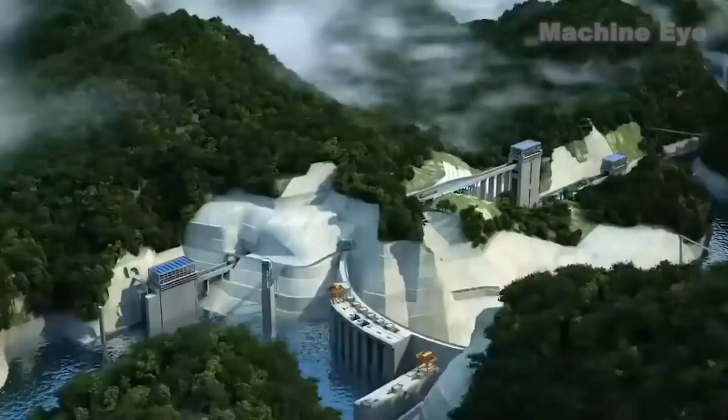Simply the largest, most expensive, most powerful, and arguably the most controversial dam in all of history. Today, we take you to China. China is building the world's largest dam in Tibet, in the upper stream of the Brahmaputra, this river flows. The very terrain that once halted vessels in their tracks has now transformed into a pathway for massive ships to glide across. How could such a feat be achieved? What kind of groundbreaking technology would make this possible? Join us as we dive into this colossal project, which is reshaping an entire region and pushing the boundaries of what we thought was possible in infrastructure. Could this combination of hydropower and transport innovation be the key to the future? Stick around to find out.

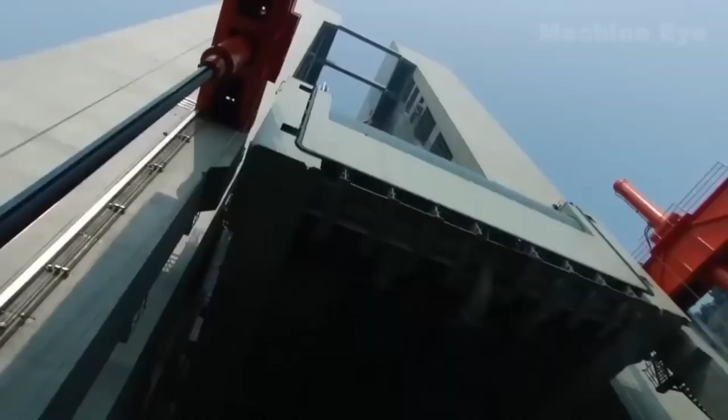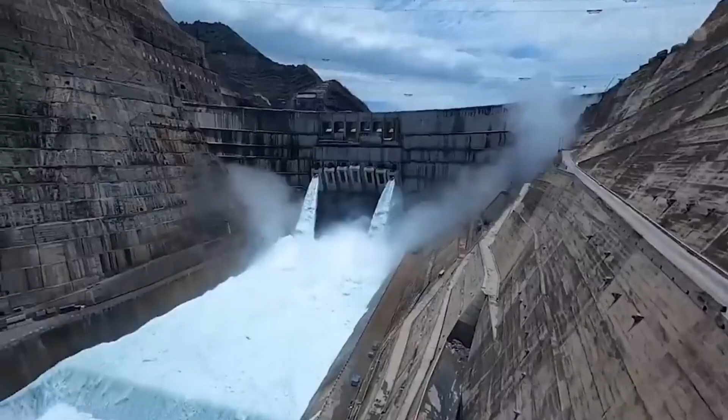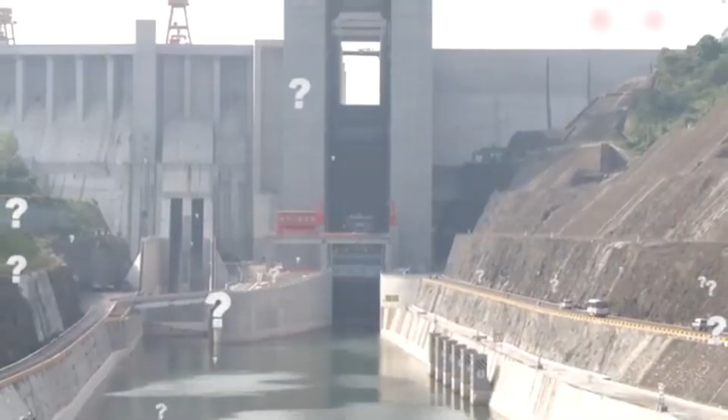Hydropower in China's energy strategy. Hydropower plays an essential role in China's renewable energy strategy, contributing significantly to the country's efforts to reduce carbon emissions and combat climate change. As one of the world's largest producers of hydropower, China relies on it to meet a substantial portion of its growing energy demands. The country's vast network of rivers, including the Yangtze and the Yellow River, has enabled the construction of some of the world's largest hydropower projects, helping China become a global leader in renewable energy production. Hydropower serves as a key component of China's overall energy mix, alongside solar and wind power, allowing the nation to gradually shift away from fossil fuels. China's focus on hydropower is driven by its goals to achieve energy security, reduce air pollution, and lower greenhouse gas emissions.

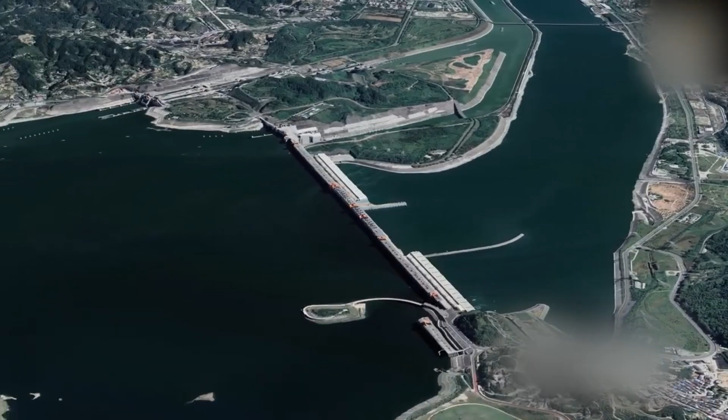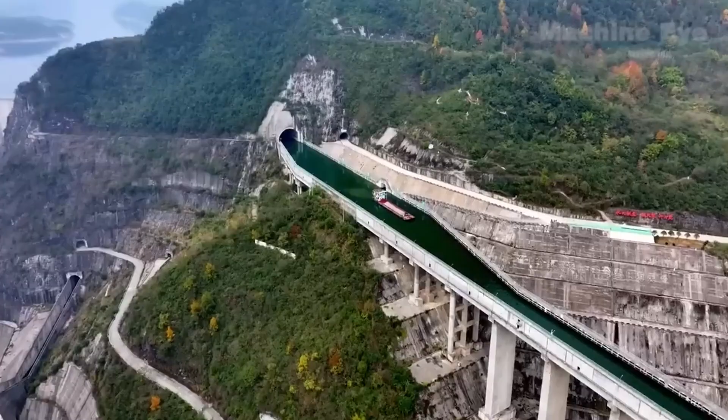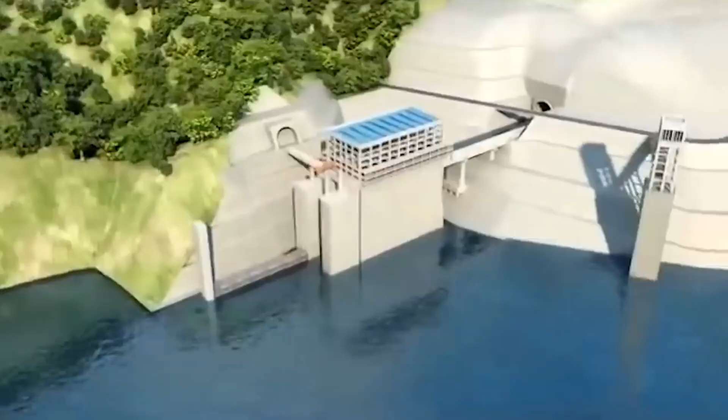With massive energy needs due to its population and industrial base, China has made hydropower a central part of its strategy to increase the share of renewable energy in its overall energy portfolio. It also allows the country to take advantage of its natural topography and river systems, which offer ideal conditions for building large dams and power stations. As the global demand for clean energy rises, China's hydropower sector has grown in prominence as a model for large-scale renewable energy projects that offer both environmental and economic benefits. The hydropower initiatives entirely suit China's commitments to international obligations to decarbonize, with global energy sustainability actively discussed in international agendas. China's own showcase of hydropower technologies becomes the solution for large, clean energy production, such as the Three Gorges Dam, Baihetan Dam, and Goupitan Dam in China are some of the most advanced engineering marvels in renewable energy generation. These are projects that not only suffice but also serve the world's sustainable future by providing alternatives to coal and other non-renewable energy sources.

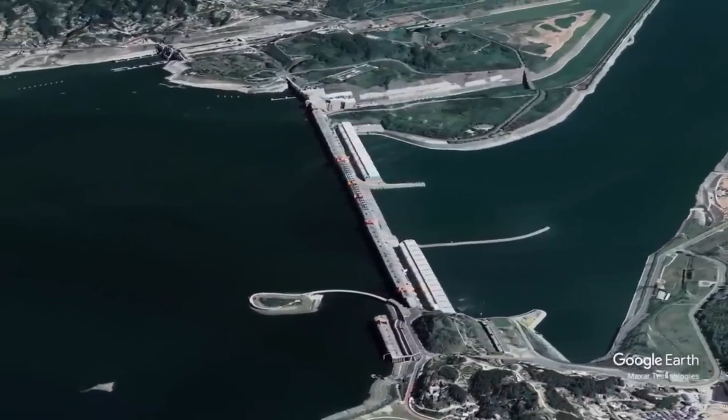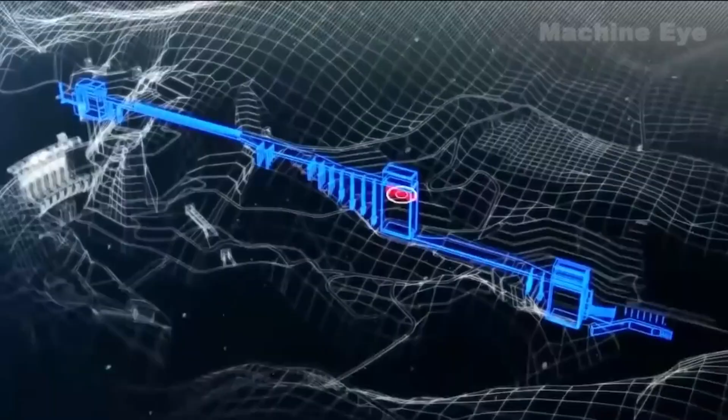However, the social and environmental impacts of this impressive hydropower wonder are hotly debated in China. Construction of large dams and hydropower stations will normally require flooding extensive areas with the attendant displacement of communities and disturbance to ecosystems. China has now advanced a program of strict environmental regulations and ecological restoration designs for the affected areas. Thus, hydropower remains the mainstay of renewable energy in China as it balances energy demands with the country's sustainability goals and economic growth ambitions.

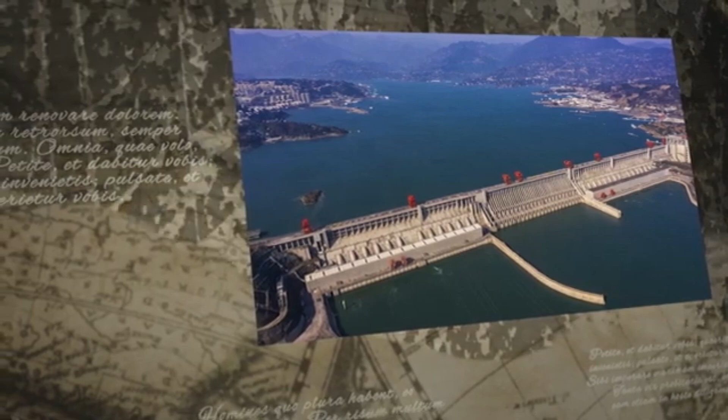And when it comes to pushing the limits of engineering, one hydropower project takes it to a whole new level by merging energy with transportation in a way you've never seen before.

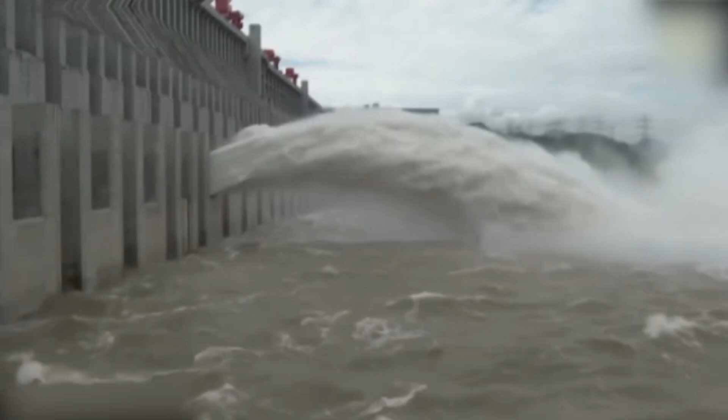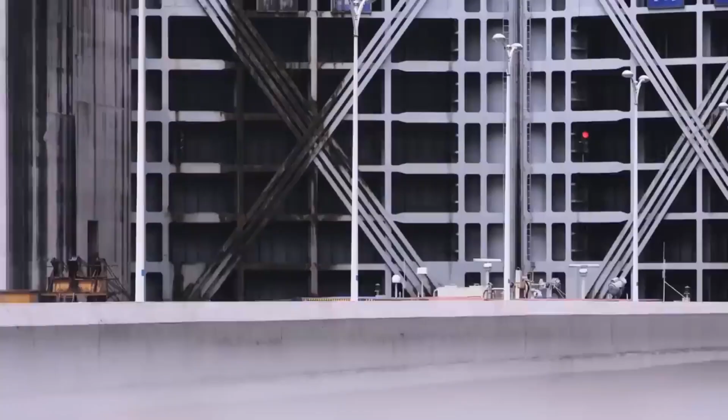Top hydropower projects in China. China is home to some of the world's most impressive and influential hydropower projects, with the Three Gorges Dam standing out as the most iconic. Located on the Yangtze River, it is the largest hydropower station globally, both in terms of installed capacity and power generation. With a capacity of over 22,500 megawatts, it produces more than 100 terawatt-hours of electricity annually, which helps supply power to large portions of the country, including major cities like Shanghai. The Three Gorges Dam is a symbol of China's engineering prowess and commitment to renewable energy, and its sheer scale makes it a crucial part of China's energy strategy.

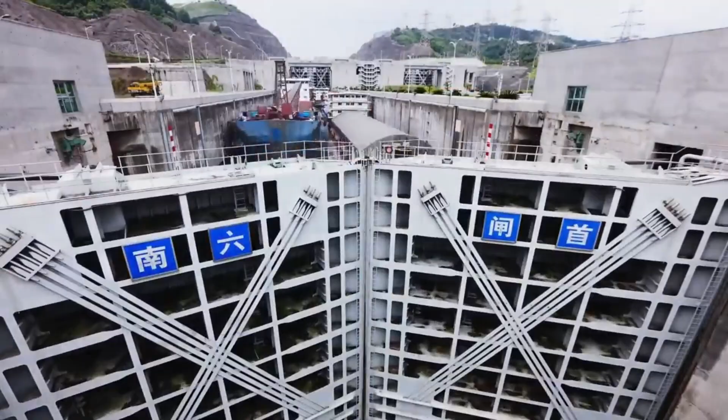Another remarkable hydropower project is the Baihetan Dam, which holds the title as the second largest hydropower station globally, located on the Jinsha River in southwestern China. The Baihetan Dam boasts an installed capacity of 16,000 megawatts. Its construction involved complex engineering challenges, such as tunneling through mountains and managing the region's seismic activity. Baihetan is crucial for stabilizing power grids in the southwestern and central regions of China, providing energy to regions that historically suffered from power shortages. This project further cements China's position as a leader in hydropower generation.

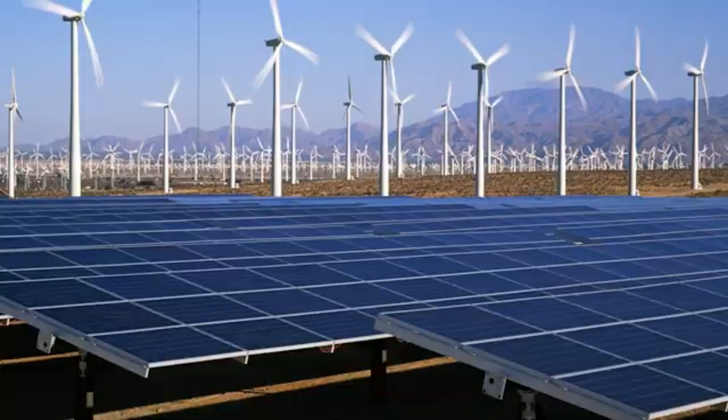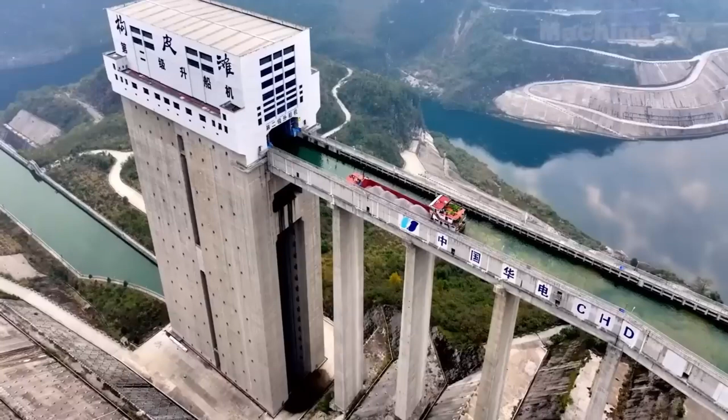Another very impressive hydropower station with respect to not only capacity, but also innovative support infrastructures is the Goupitan Dam alongside the Wujiang River in the province of Guizhou. The Goupitan hydropower station generates energy using 3,000 megawatts of installed capacity and is still the world's largest shiplift system. This system is supposed to be used to bypass the dam and river ships so that they can continue navigating the river. Renewable power generation and advanced transport infrastructure thus together prove the capacity of China to harmonize energy creation and logistics. Finally, these three hydropower stations might stand on a significant portion of the energy capacity for the country

in the future, with regard to not just conventional energy but also renewable energy. Not just to the world do they show how competent China is in availing itself of its natural resources for the development of this country, but they also demonstrate how much effort China puts into developing technologies and methods to counter all geographical and environmental challenges.

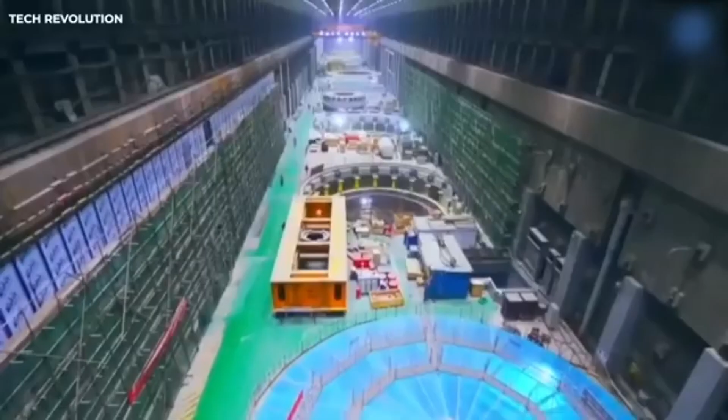These projects depict how hydropower is central to China's energy. The Goupitan shiplift, located at the Goupitan hydropower station, stands as one of the largest and most impressive examples of this technology. It consists of a multi-stage vertical system that enables ships to ascend a massive 199 meters, equivalent to the height of a 66-story building.

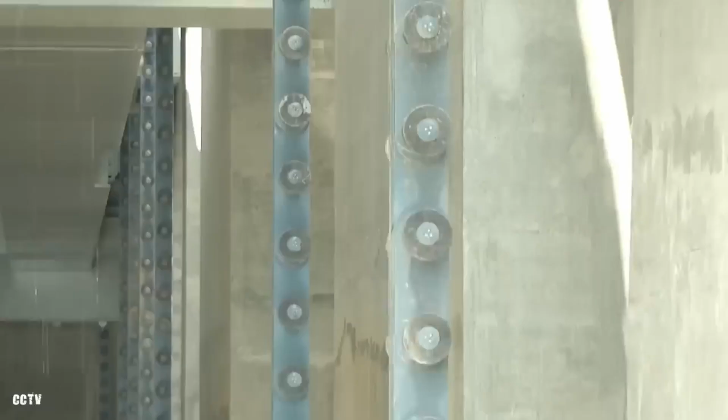This lift system allows vessels traveling on the Wujiang River to bypass the Goupitan Dam, which would otherwise impede navigation due to the extreme height difference between the upstream and downstream water levels. The shiplift works by using large, water-filled chambers to raise and lower ships with the help of a series of cables and gears.

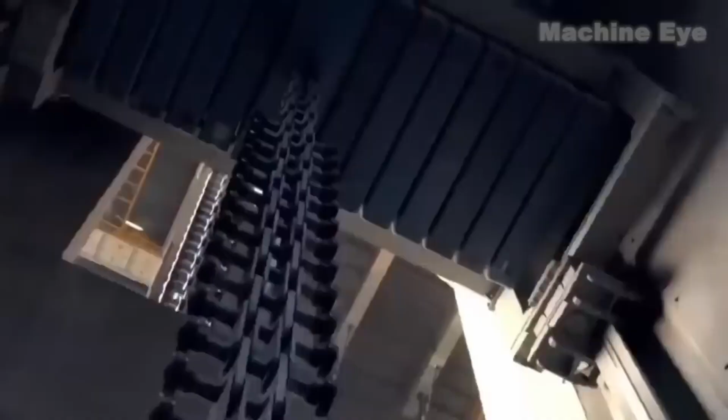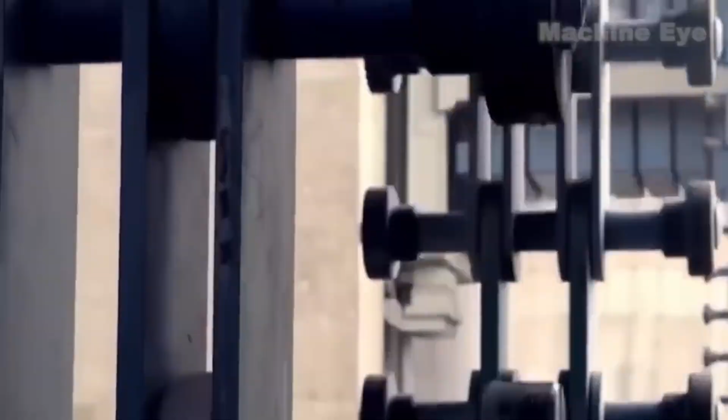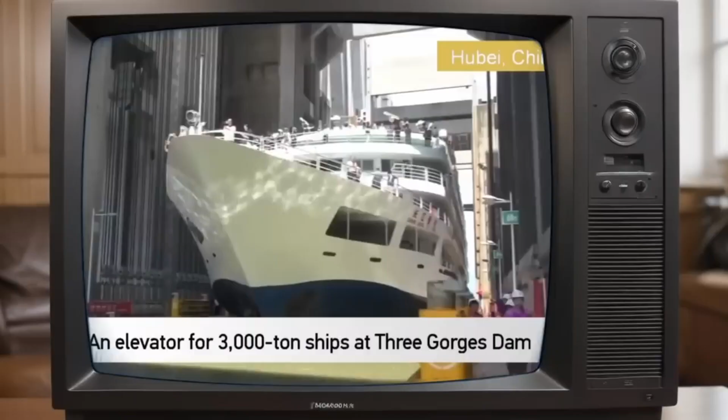These systems enhance the economic opportunities for remote regions linked to such waterways with more extensive inland ones, and by minimizing the truck travel, they lead to more sustainable development, since emissions from trucks are very carbon-intensive. Therefore, shiplifts lend themselves to being an important and emerging piece of the infrastructure evolution as traffic increases for cleaner, more efficient transport modes.

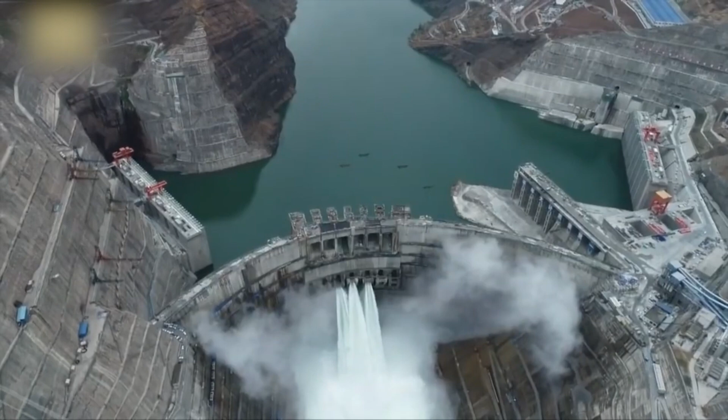An engineering marvel, the Goupitan shiplift, located at the Goupitan hydropower station on the Wujiang River, is a groundbreaking engineering achievement that enables vessels to bypass a dramatic elevation difference of 199 meters. This enormous lift system is a prime example of China's innovative approach to overcoming geographical challenges.

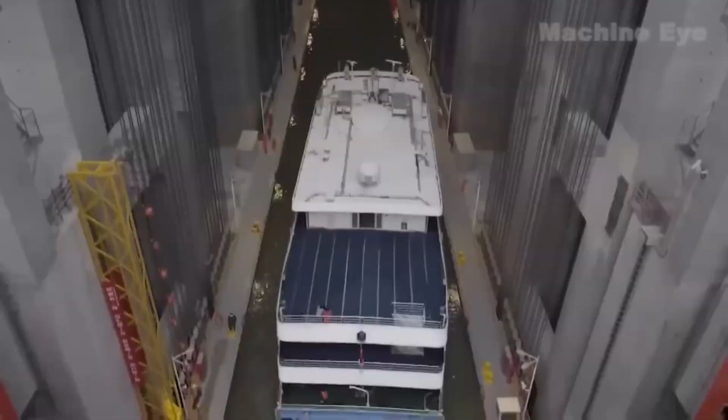The shiplift comprises 3 vertical stages, each designed to raise and lower vessels with precision. The ship enters a large water-filled chamber, and using a combination of cables, gears, and hydraulics, it is raised or lowered through each stage, effectively allowing ships to traverse the dam's high water barrier with minimal delay.

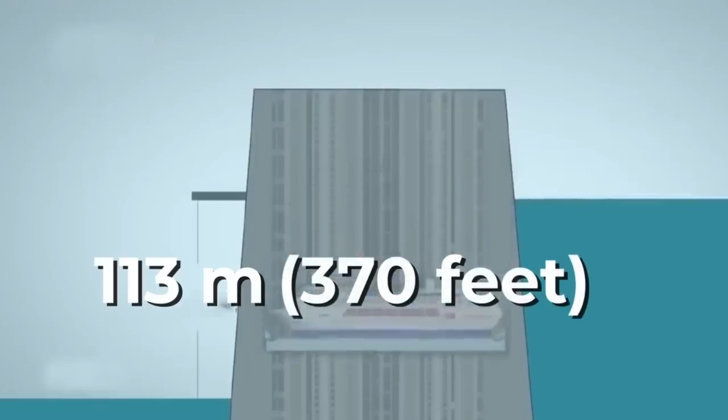What sets the Goupitan shiplift apart is its massive scale and efficiency. With a lifting capacity capable of handling vessels weighing up to 500 tons, the system is essential for maintaining the flow of goods and services along the Wujiang River, especially in a region with rugged terrain that would otherwise make water transportation nearly impossible. The lift operates with an incredible degree of precision, ensuring that vessels are moved smoothly and safely even in challenging environmental conditions.

This type of engineering sophistication not only addresses local transportation issues, but also showcases China's ability to push the boundaries of modern infrastructure.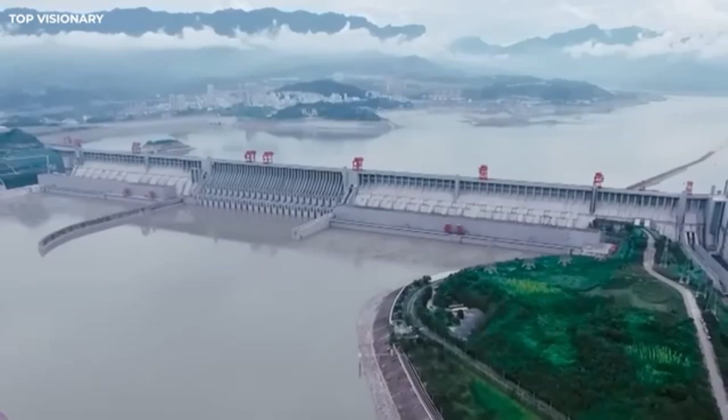When raising it, the lift precision, which is maintained within a plus or minus 10 mm tolerance, is thus another testimony to excellence in Chinese engineering. Besides that, the integration into the larger hydropower station so that it can be used without compromising its function in the generation of power makes the whole project not only effective but also sustainable.

Goupitan shiplift is an engineering wonder of the modern age. It is also a wonder of economics, as it cuts time and cost incurred by vessels when importing goods through the Wujiang River by very many times.

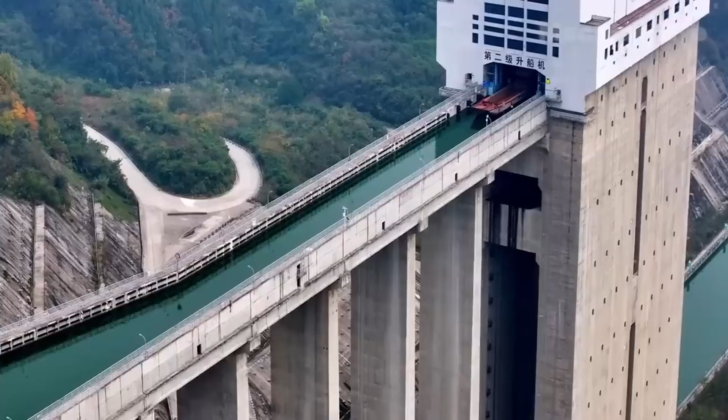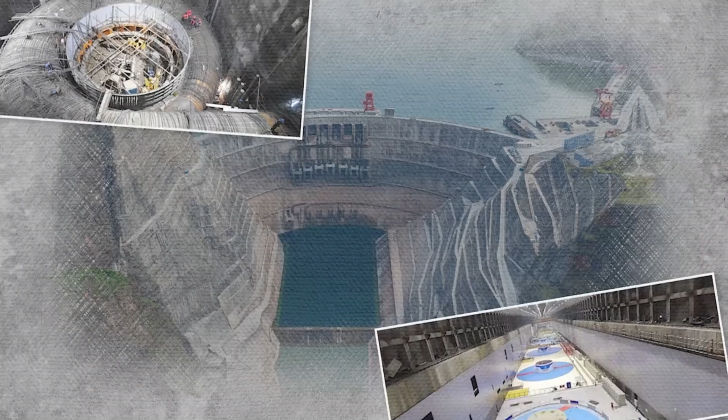This infrastructure lifts the prospects of energizing the economy of the region, besides ensuring that inland shipping routes critical for the future advancement of remote areas remain open. Such a development is testimony to how large-scale engineering can come to solve what appear to be multiple needs, transforming hostile topography to economic powerhouses while remaining a flag-bearer of sustainable development and technology.

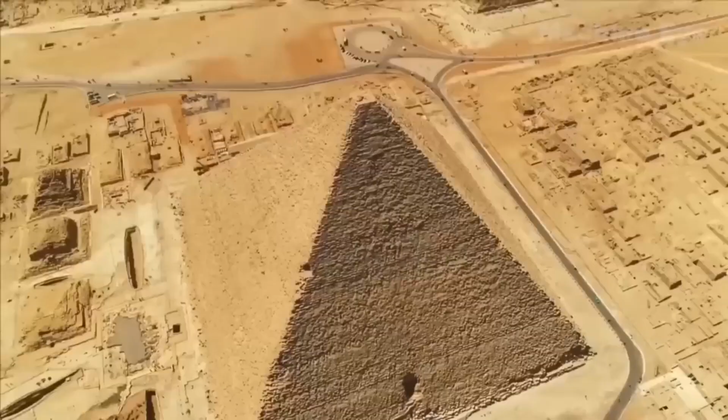Evolution of infrastructure projects in China. China's infrastructure has undergone a remarkable transformation over the past few decades, evolving from basic transportation networks to world-class projects that set the standard for the global engineering community. In the 1950s and 1960s, the country's infrastructure was limited, primarily focusing on basic roads, bridges, and railways. The lack of modern technology and resources made it difficult for the country to keep up with industrialized nations.

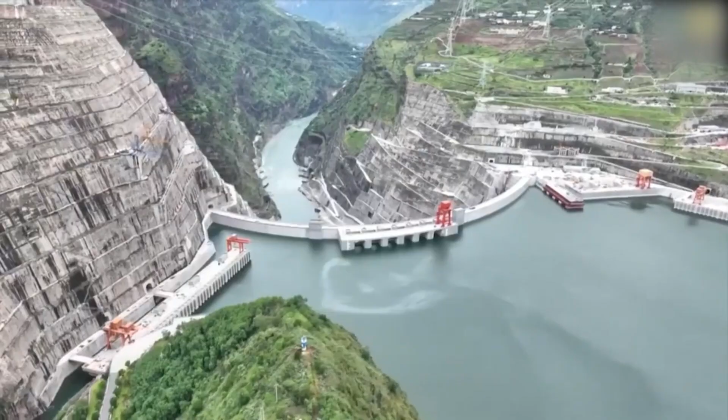However, beginning in the 1980s with economic reforms, China began investing heavily in infrastructure, driven by the need to support its growing population and rapidly expanding economy. This shift marked the beginning of a new era of large-scale, high-tech infrastructure development. By the 2000s, China's commitment to building world-class infrastructure became more evident. The country invested in massive projects like the high-speed rail network, which has become the largest in the world.

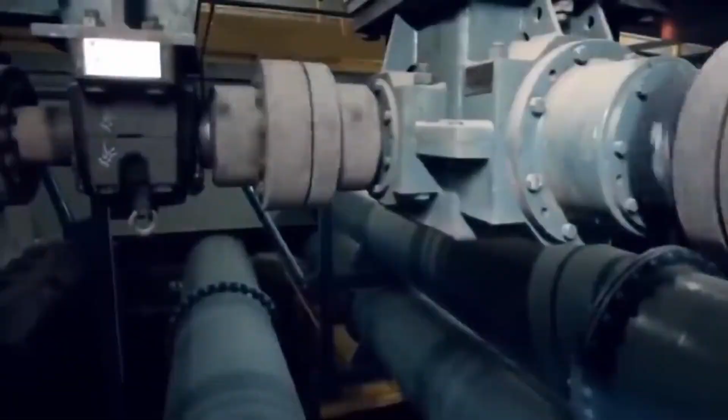The construction of the Three Gorges Dam, one of the largest hydropower projects in the world, also symbolized China's ambition to be at the forefront of technological innovation. These infrastructure advancements were aimed at improving domestic logistics and connectivity, and bolstering China's role on the global stage, by employing cutting-edge engineering techniques to overcome significant geographical challenges, from mountain ranges to vast rivers.

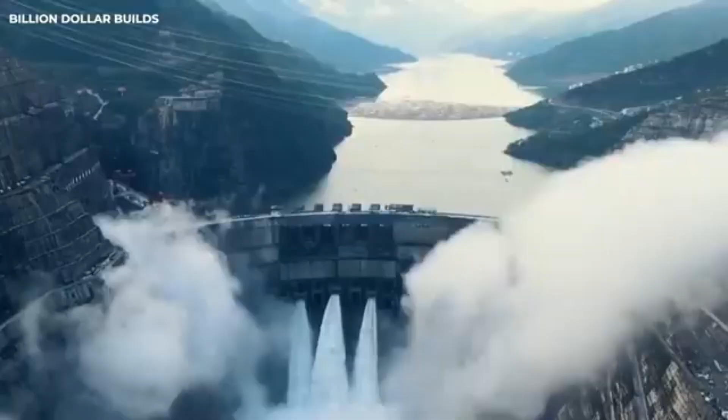As China continues to revolutionize infrastructure, one project stands out not just for its scale, but for its profound impact on the economy of a once isolated region.

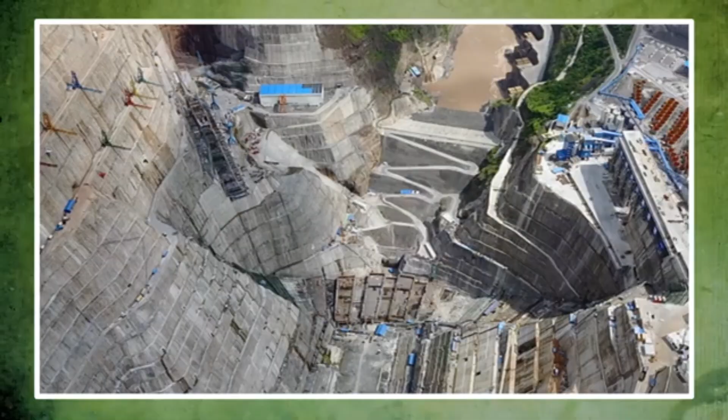The economic impact of the Goupitan shiplift. The Goupitan shiplift plays a crucial role in enhancing trade and economic activity, particularly in Guizhou province, which is often considered a more remote and economically underdeveloped region of China.

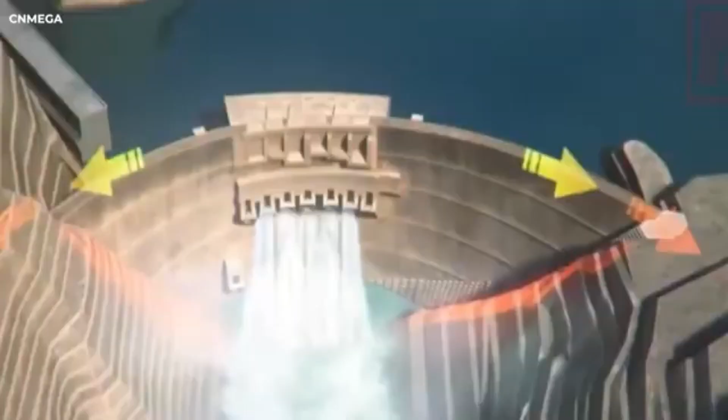By connecting Guizhou to the Yangtze River via the Wujiang River, the shiplift facilitates faster and more efficient transport of goods, reducing reliance on overland transportation routes that are often slow and costly due to challenging mountainous terrain. This improved access to one of China's most important waterways allows for a more streamlined flow of raw materials, manufactured goods, and agricultural products, boosting the region's economic potential.

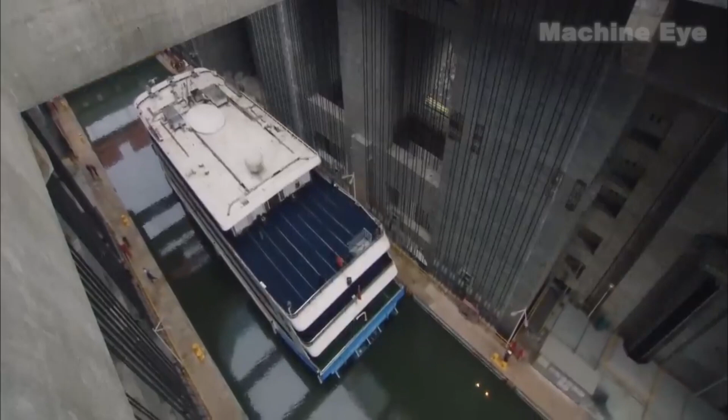Before the introduction of the shiplift, shipping along the Wujiang River was limited by the dam, which created a massive elevation difference that required slow and complex detours. With the Goupitan shiplift, vessels can bypass the dam quickly, cutting down on travel time.

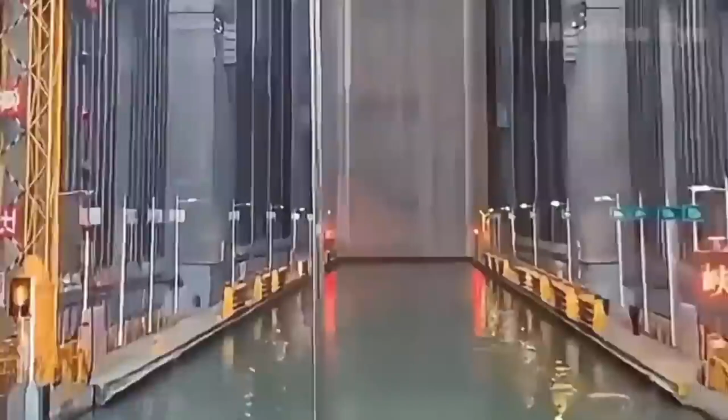This reduction in transit time lowers transportation costs, making goods more affordable and competitive in both domestic and international markets. It also increases the overall efficiency of the region's supply chains, helping businesses in Guizhou expand their operations and access broader markets, both within China and globally.

The Goupitan shiplift has economically benefited job creation and regional development. The construction and running of the lift have afforded work to thousands of locals, not only in hydropower and shipping but in supporting industries such as logistics, engineering, and tourism, thus becoming a massive multiplier.

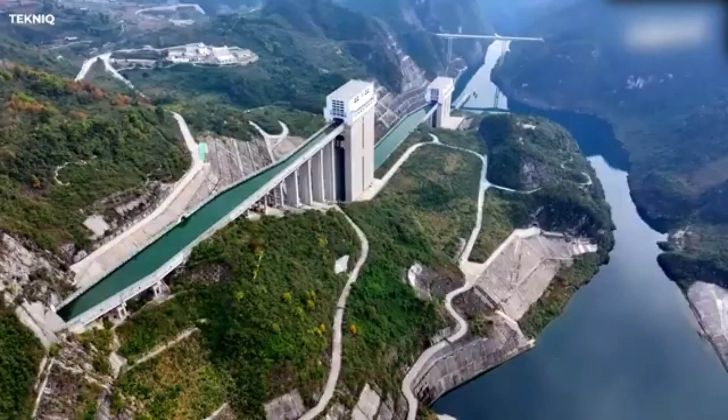With better access to trading routes, the area has further attracted investments for infrastructure and industries, which have impacted the regional economy for its development further.

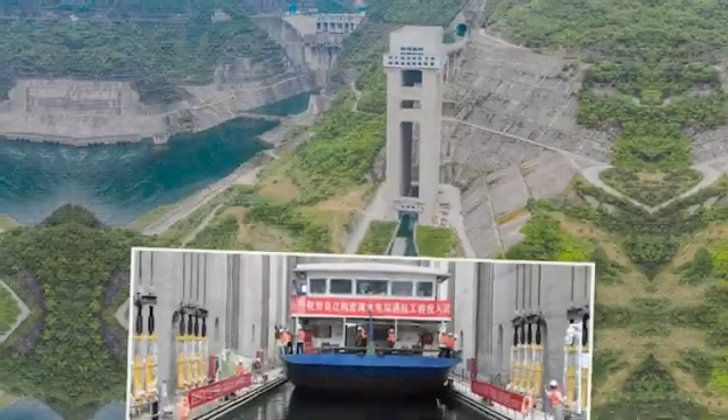On a higher scale of integration, the construction in Guizhou will serve as a broader shipping network for the Yangtze River, motivating another set of accelerative driving forces into the establishment of new emerging industries and urbanization, so that the living standards of people are developed on different fronts.

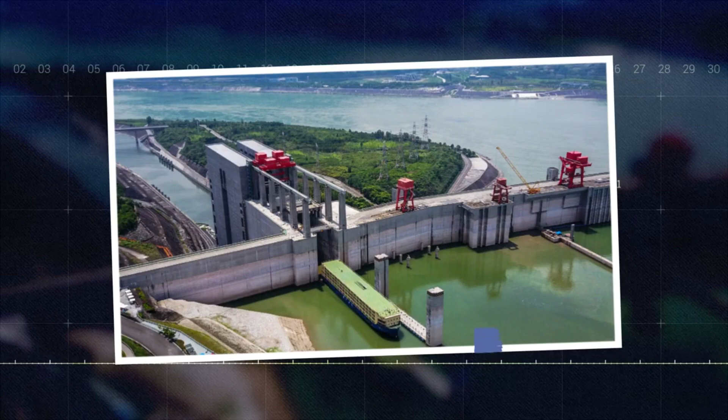Moreover, the Goupitan shiplift, apart from its varied local economic benefits, serves the national economic interest by strengthening China's aspirations to improve its internal logistics network. Besides serving Guizhou as a transportation hub, the lift fortifies the chances for optimizing China's internal trade routes, an endeavor that enhances the efficiency of China's national economy.

Besides regional development considerations, the Goupitan lift also meets the burgeoning need for efficient freight transport infrastructure, a significant propellant of growth for China and global competitiveness.

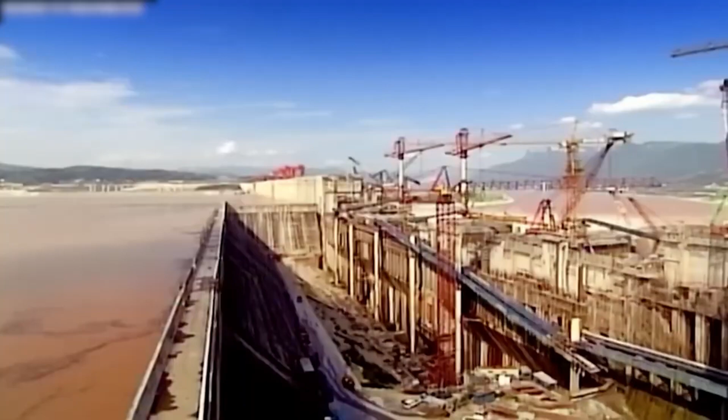Environmental considerations: while hydropower projects like the Goupitan Dam provide significant benefits in terms of clean energy production, they also bring environmental challenges that must be addressed. One of the most prominent environmental concerns is the impact of large dams on local ecosystems.

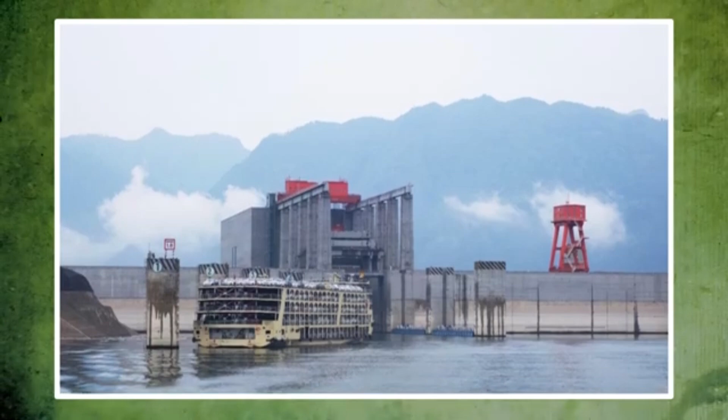The construction of such dams often leads to the flooding of vast areas, submerging forests, agricultural land, and even entire communities. This disrupts wildlife habitats, displaces species, and alters the natural flow of rivers, which can have cascading effects on local ecosystems. Additionally, the accumulation of water behind the dam can affect fish migration and water quality, which may disrupt aquatic life and the livelihoods of people who rely on these waterways for fishing and farming.

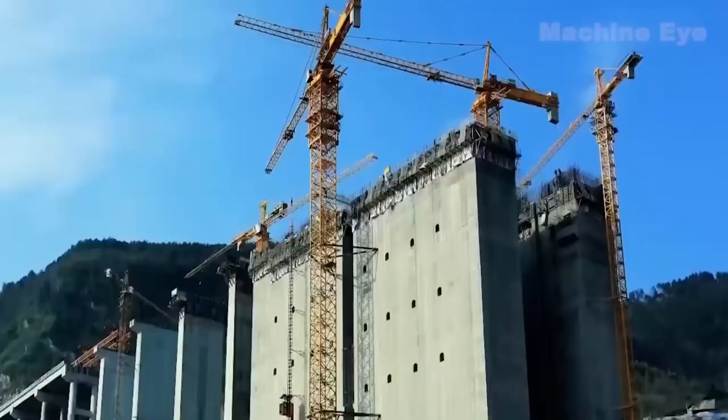To mitigate these impacts, China has implemented various measures in its hydropower projects. For instance, the Goupitan Dam project included a focus on minimizing disruption to the local environment and ensuring that ecosystems were as protected as possible during construction.

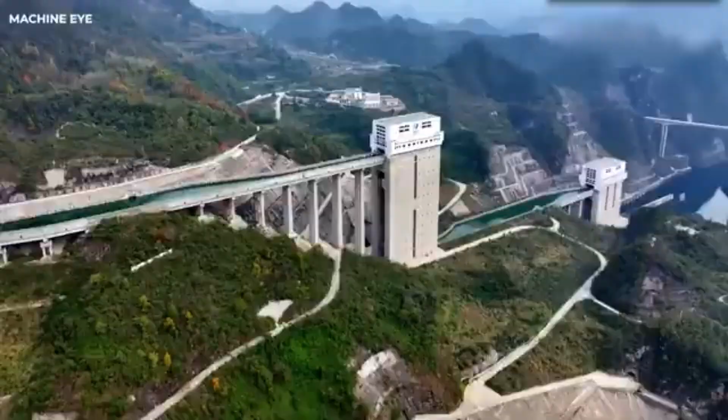Efforts to restore ecosystems in the affected areas are integral to the success of these large-scale projects. These measures may include replanting vegetation, creating wildlife corridors to allow animals to migrate safely, and introducing fish ladders or other devices to facilitate the movement of aquatic species.

Additionally, hydropower plants are increasingly designed with environmental sustainability in mind, integrating renewable energy generation with efforts to preserve local biodiversity. Moreover, China has laid out comprehensive environmental regulations for hydropower development, including environmental impact assessments to be done before project approval. These assessments determine the whole range of environmental effects and measures taken to mitigate adverse effects.

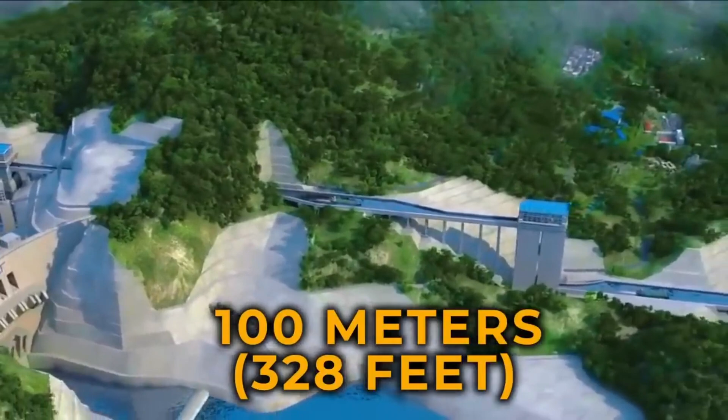China attempts to balance energy needs and environmental protection by improving engineering methods and restoration efforts. This was done not just to maximize the benefits from hydropower energy production, but more importantly to protect the long-term livelihood of nature. However, even with such efforts, complete avoidance of the environmental impacts of hydropower is impossible.

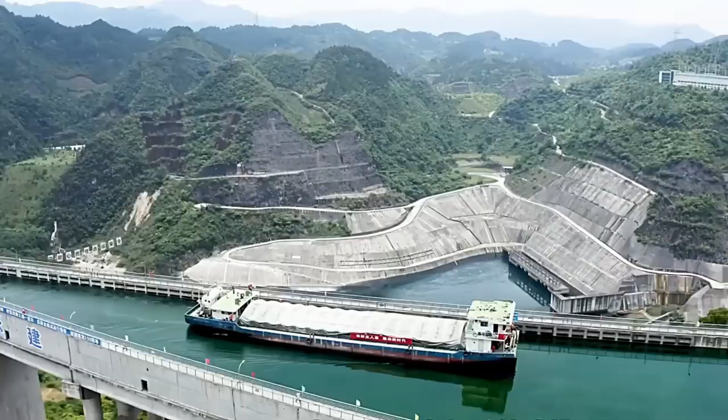Additionally, the accumulation of water behind the dam can affect fish migration and water quality, which may disrupt aquatic life and the livelihoods of people who rely on these waterways for fishing and farming.

To mitigate these impacts, China has implemented various measures in its hydropower projects. For instance, the Goupitan Dam project included a focus on minimizing disruption to the local environment and ensuring ecosystems were as protected as possible during construction.

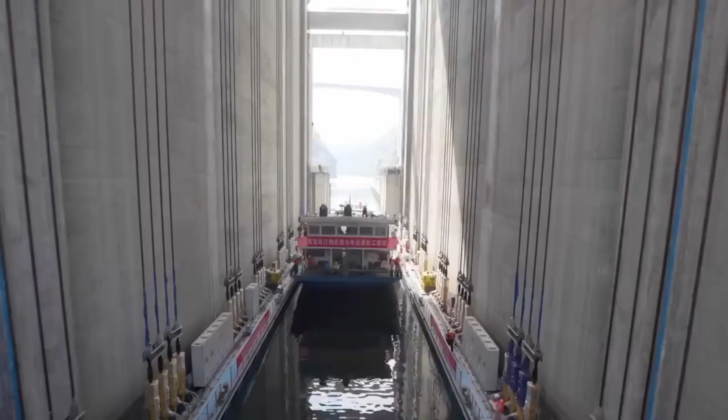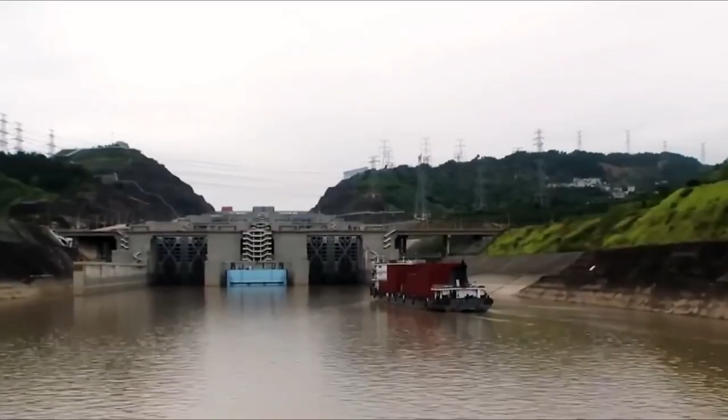Efforts to restore ecosystems in the affected areas are integral to the success of these large-scale projects. These measures may include replanting vegetation, creating wildlife corridors to allow animals to migrate safely, and introducing fish ladders or other devices to facilitate the movement of aquatic species.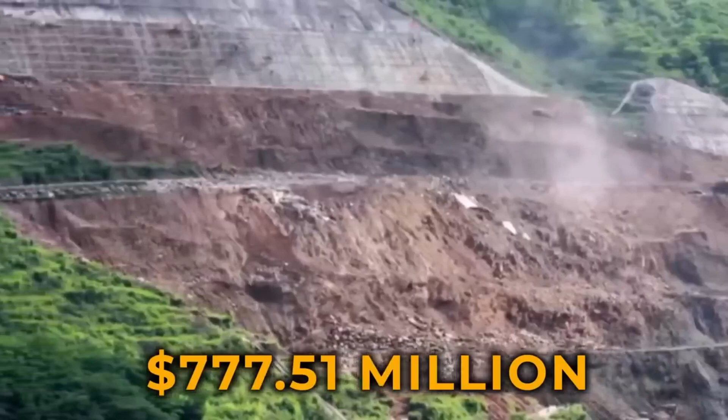Additionally, hydropower plants are increasingly designed with environmental sustainability in mind, taking care to integrate renewable energy generation with efforts to preserve local biodiversity. China's hydropower sector is equipped with thorough environmental regulations, including EIA, which allows a prior environmental impact assessment before project approval.

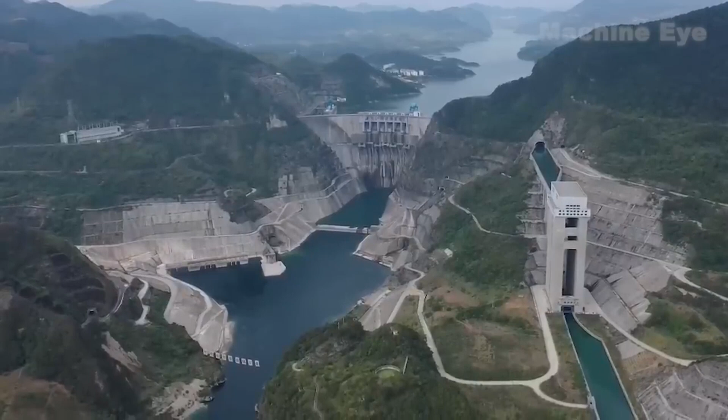EIAs ensure full knowledge of the range of environmental impacts and that steps are taken to mitigate adverse effects. By sound investment in engineering practice and ecological restoration, China wants to balance energy demands with environmental protection, while also placing major emphasis on the benefits of hydropower to energy production and the long-term welfare of natural habitats.

Even so, there will always remain some lingering environmental impacts that cannot completely be avoided, with the advantages of clean, renewable energy on one side and the disturbances of huge dam constructions on the other.

China is trying to keep improving its approach to hydropower development, coming up with creative solutions to cater to both environmental concerns and potential energy crises. The balancing act for the country remains to harmonize sustainable energy development with natural resource conservation, ensuring hydropower remains environmentally friendly in its overall energy future.

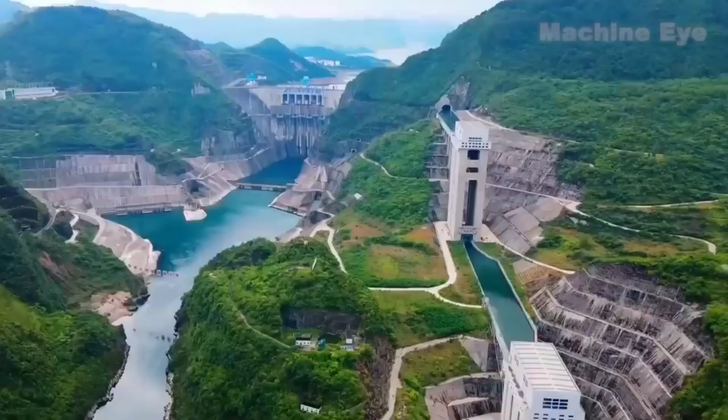China's global infrastructure leadership: China has rapidly emerged as a global leader in infrastructure development, extending its influence far beyond its borders through ambitious projects across Asia, Africa, and even parts of Europe.

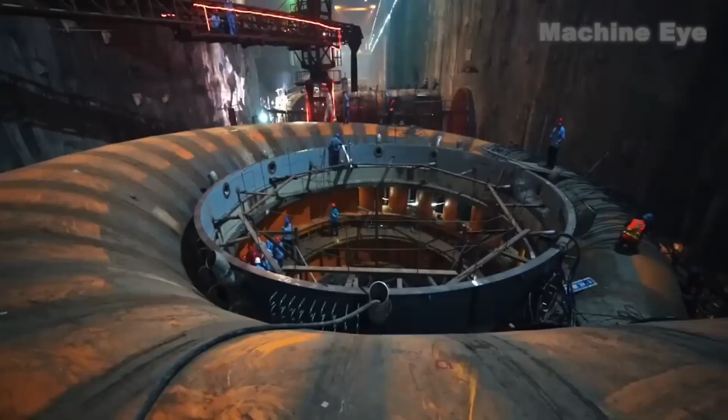The country's expertise in large-scale construction, particularly in transportation, energy, and water management systems, has allowed it to spearhead significant international projects. This leadership is a direct result of China's enormous investment in domestic infrastructure over past decades, giving it the experience, technological know-how, and financial backing for major global initiatives.

For instance, the Belt and Road Initiative, BRI, stands as a monumental example of China's strategy to build critical infrastructure in countries that need modern transport, energy, and communication systems.

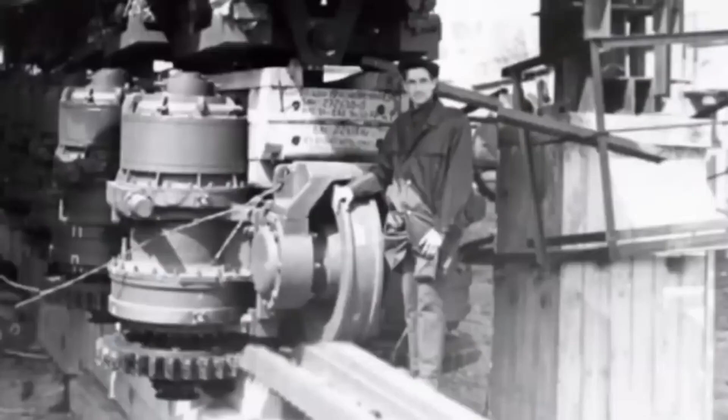One key area where China has made its mark internationally is hydropower development. By offering financing, technology, and expertise, China has helped build some of the world's largest hydropower plants in countries like Ethiopia, Pakistan, and Laos. Projects such as the Merowe Dam in Sudan and the Karot hydropower station in Pakistan showcase China's ability to apply its extensive knowledge of hydroelectric systems to diverse geographical and environmental conditions.

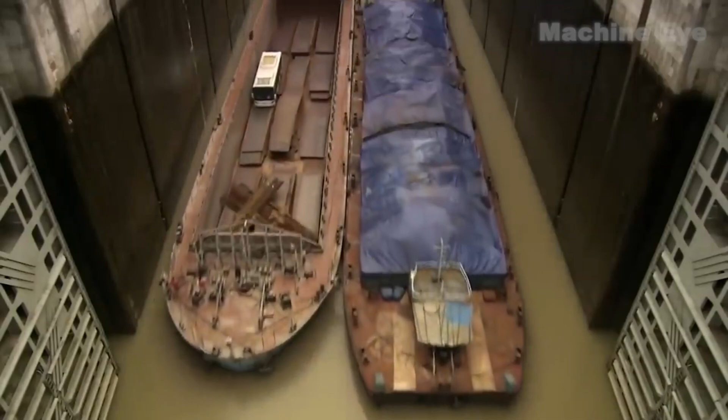These projects not only generate renewable energy but also improve local economies by providing reliable electricity to previously underserved regions, while also creating jobs and promoting long-term economic growth.

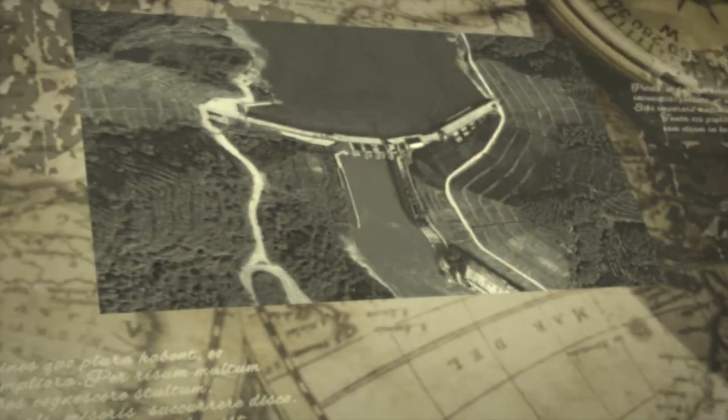China has also proved itself a big player in the world of high-speed rail construction alongside hydropower. Indonesia and Thailand, among Asian countries, got interested in developing advanced rail systems with help from Chinese firms. China's prestige and capability in building the world's largest network of high-speed rail proves it is seriously invested in advanced transport technology, not on a small but on a grand scale.

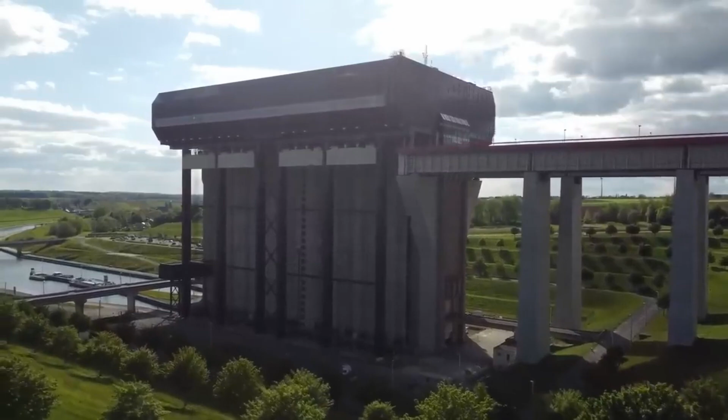Technological advancement and fast-track construction of these projects trace back to China's collective experience in large infrastructural undertakings, such as the Goupitan hydropower station and its shiplift.

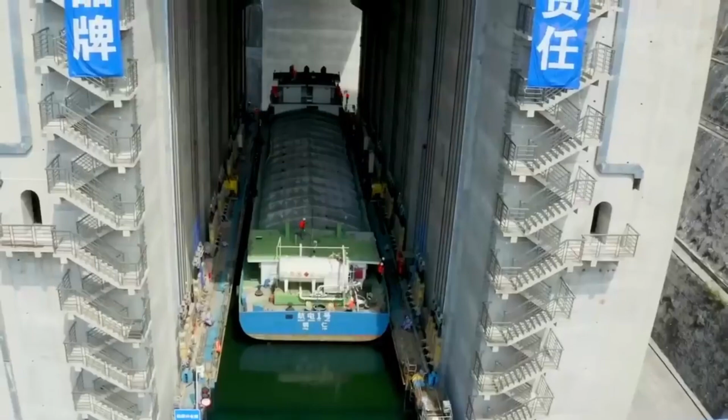Gradually, China has spread its wings beyond the developing world and into the infrastructure arena of developed nations. Part of China's continental reach has given it contracts for bridges, tunnels, and roads across Europe, with a high presence in world markets as testimony to its capacity for high quality and complicated project delivery, which also promotes development in the host nations.

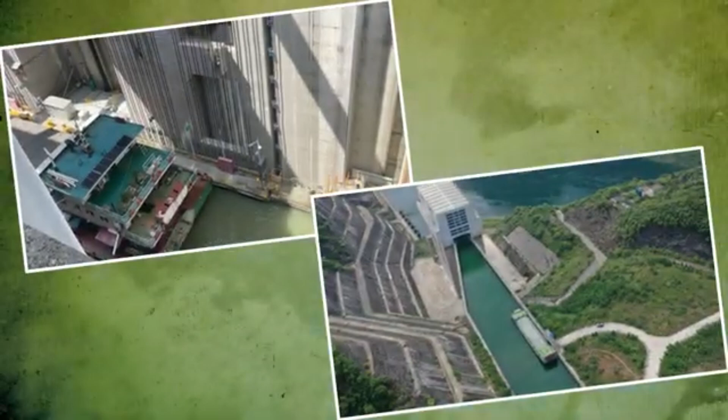So it is assumed that while China is spreading its influence in the infrastructure world, it would also have a significant role in continuing the impulse for the development of global infrastructure technology.

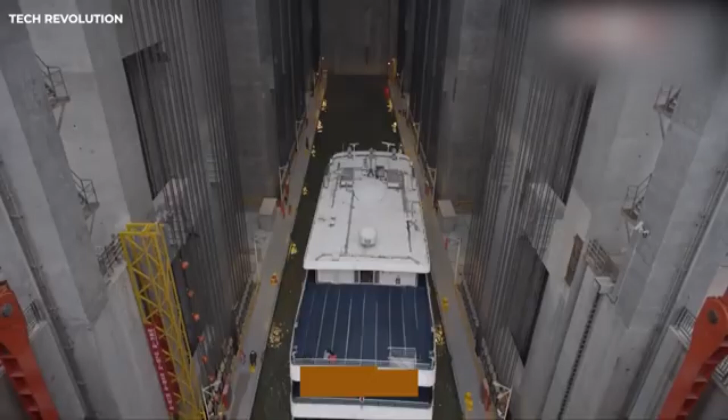Given its capacity to deliver world-class infrastructure projects, China may, in the next phase of global waterway development, be involved in more sustainable shipping network construction that contributes to reducing global shipping emissions. With increasing demand for cleaner energy and transport solutions, hydropower and water transport systems will be an important vehicle in steering both China and the world towards a greener, sustainable future.